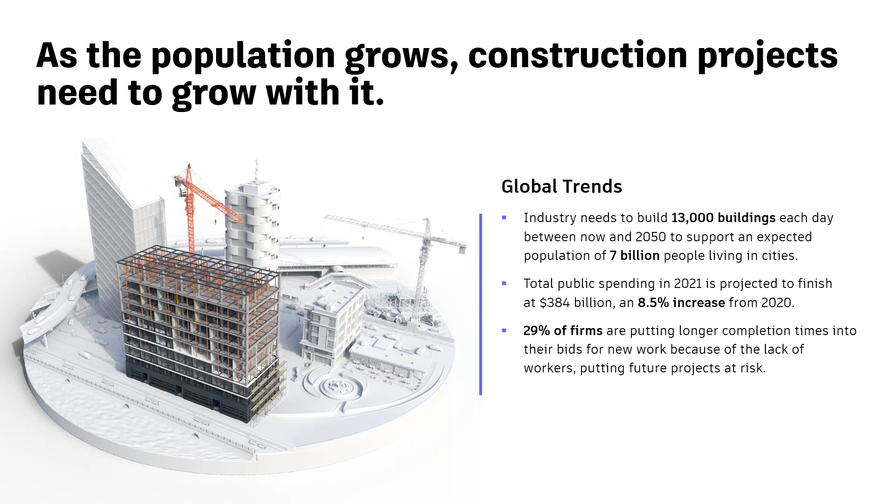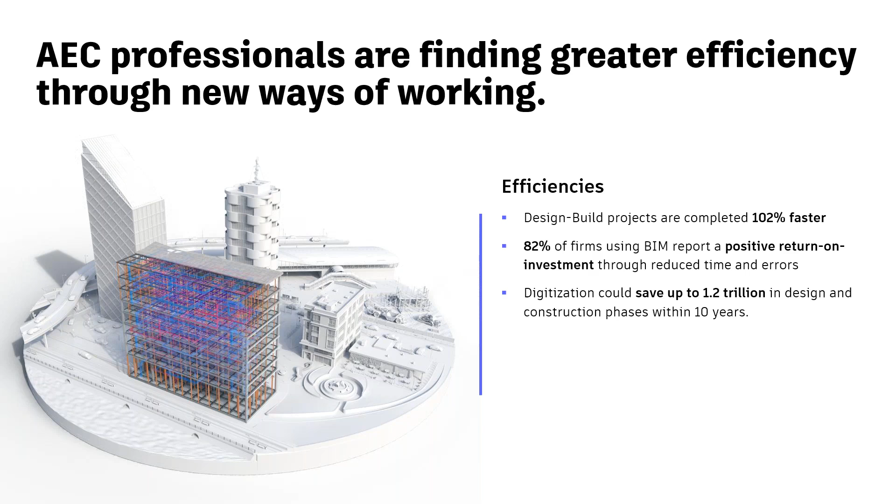But we know that change is never easy, be that changing a way of working, following new processes, or figuring out a new standard.

Wherever you are in your digital journey, be that digitizing for the first time, turning those analog processes into digital ones, or you might be at the next step of connecting and integrating all of that great digital information. Maybe you're even analyzing that data and using it to optimize your processes and workflows.

We recognize that wherever you are in that journey, you need the right tools for the job. You need them to be adaptable, accounting for changing conditions and increasing that connection between teams and products. You need them to be easy to use, allowing all members of the project team, no matter their level of expertise, to access and use all the data available to them. You also need these tools to be as automated as possible, making your life easier and taking away some of those time-consuming repetitive tasks.

So from Autodesk, what we are trying to do is help you with those efforts and outcomes, and try to automate more of the processes, make your setups easier so you can save time and promote better collaboration.

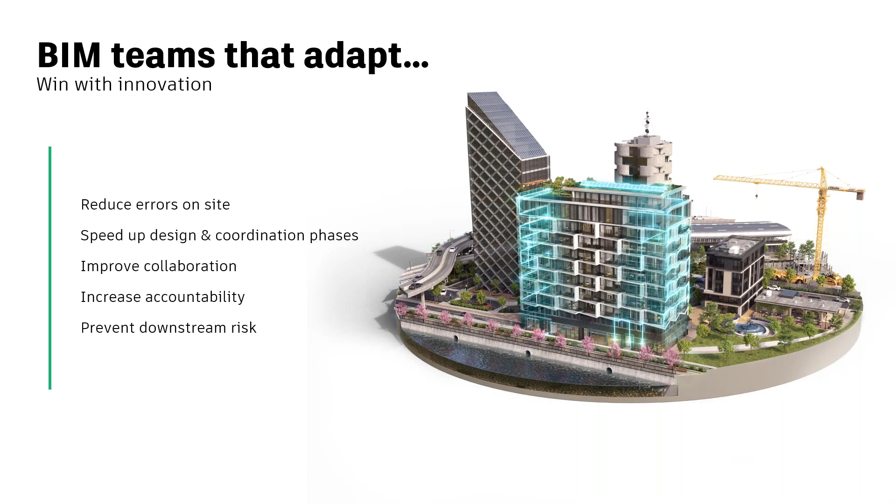Into a more cloud-based and automated design coordination process. And that's what we have been doing with model coordination, taking all those good bits from Navisworks and putting them into the cloud at a time that we know is critical for our customers, since we are all working in this digital way, right? And we are all in different locations.

And we understand that now collaboration through the cloud is critical. And that collaboration we are not only promoting, obviously, in the coordination processes, as probably most of you are aware, our Autodesk Construction Cloud focuses on various parts of that journey, starting from design into what I will call more pre-construction, construction, and operation.

And for that, we have various modules inside the Autodesk Construction Cloud that can help you with that. But ultimately, what is useful is the connectivity of all of them, and the capability of sharing that data and having connected workflows, let's say, for example, through issues in various of those modules.

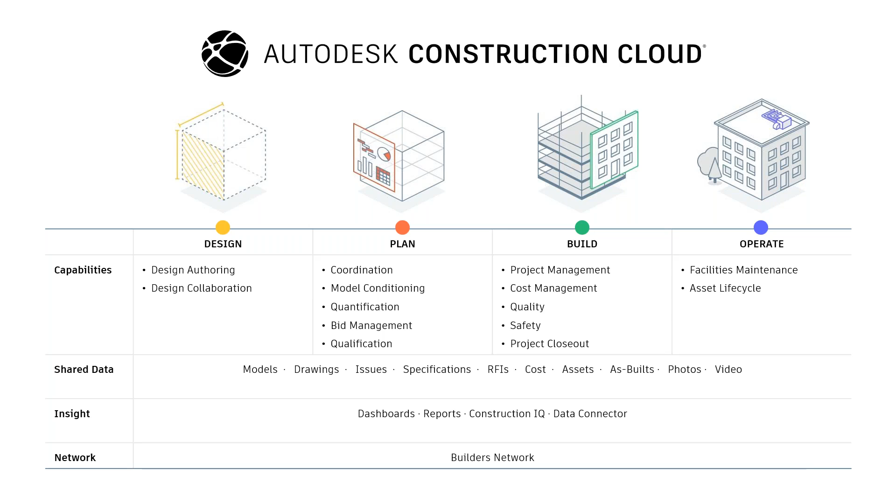And now focusing a bit more on what is Autodesk BIM Collaborate. From our side, we focus on particularly two products. Design collaboration, for those not familiar, focuses on sharing information in a controlled manner across various teams. Then we have model coordination, which focuses on aggregation of models for design coordination processes, and it automates that part of clash detection.

And of course, in both products, you can also have a communication tool through issue management, and you have that base of collaboration through the cloud with Docs. Also in the last year, we developed change analysis, which helps inside design collaboration to focus on what is changing in the project. So all these products, as we say, try to focus on the design and coordination phases.

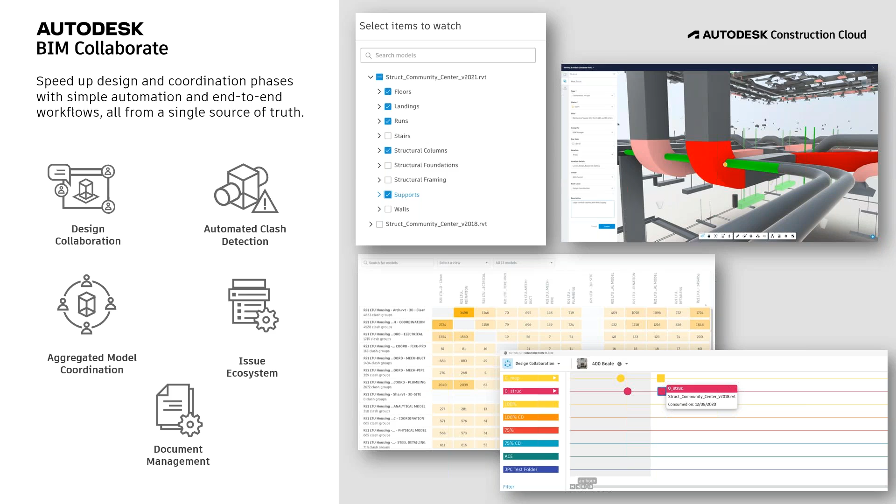So now we are going to go through new releases and then into the demos. So regarding the new releases...

I think the demo will definitely be more useful and self-explanatory, but as you can see, in the last 6 to 12 months we have been working on workflows that connect desktop applications to the cloud, and equally developing more automated workflows and easier setups in the cloud platform products. So I think now we can start the demo.

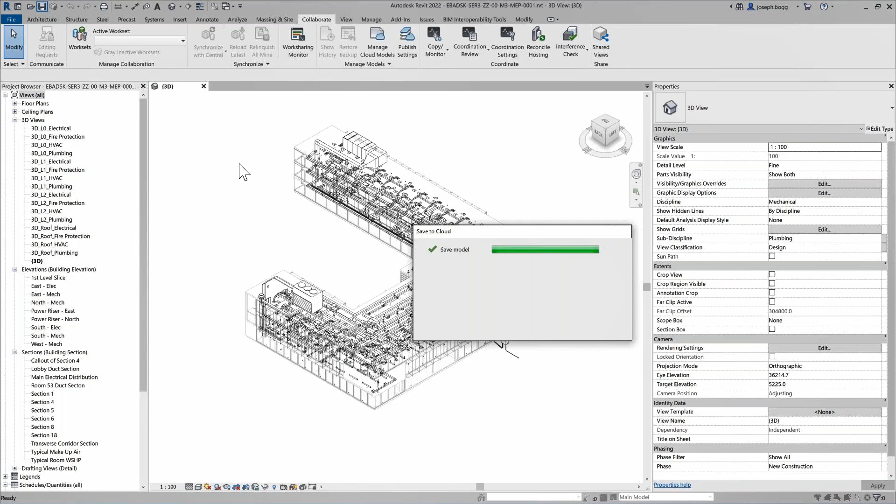So in this demo, I'm going to show you change analysis in design collaboration. And in the demo, we start in a desktop application, actually. Generally, as a designer, you might be working in Revit, and we now have the capability of connecting that desktop application together with Docs in a really easy manner, by publishing the files from the desktop into the cloud.

I think it seems that it got to stop the video.

Okay, I think now it keeps on running. So what you will see is the user is publishing a model in the MEP folder, and as the video goes through, it will open design collaboration. So that's the connectivity we are showing from desktop into the cloud.

In design collaboration, I am in the MEP team. On the left side, we have a lot of tools to communicate, like issues, meetings, and so on. On the top, we have the various teams in the project. In this project, we set up a classic building team of architectural, structure, and MEP, mechanical, electrical, and plumbing. The user belonging to the MEP team sees that in the last weeks there has been sharing of information throughout.

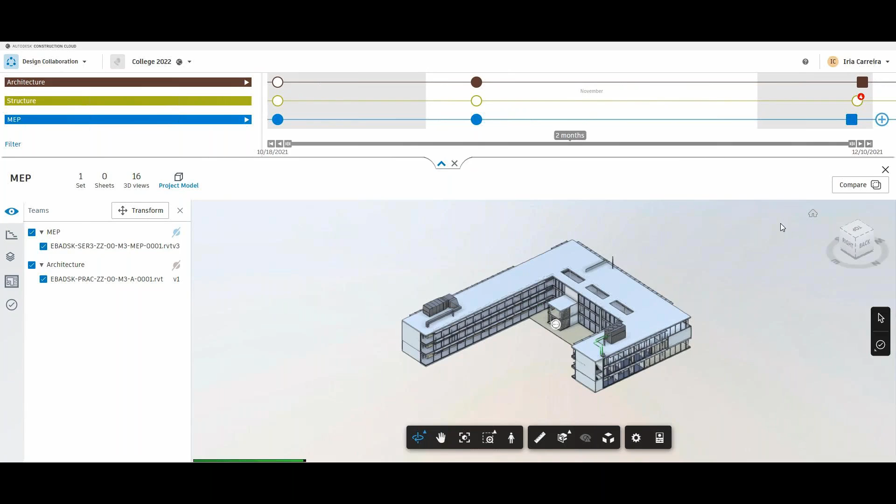As the user wants to understand how the design has evolved, they can click into the project model and start to visualize all those model shares by the other teams, federated. Once in that screen, the user can click compare and start triggering the changes tool.

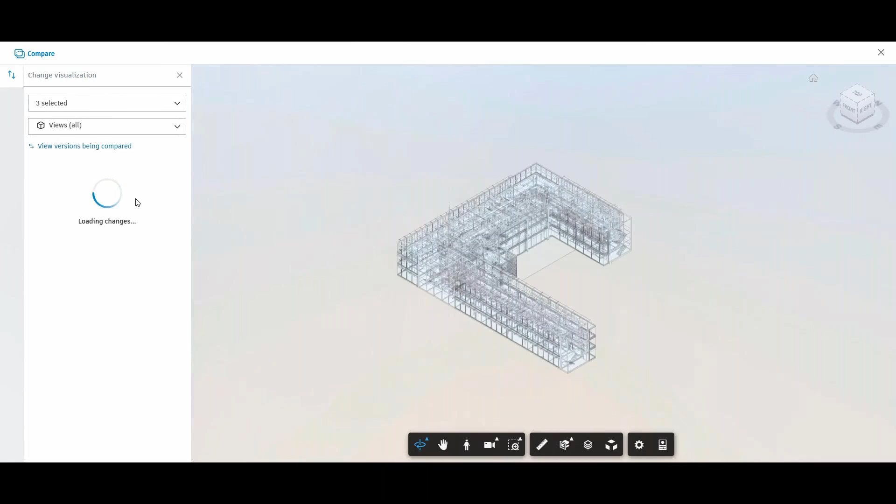In the first screen, the changes tool will allow the user to tailor what they want to look at, and then start to look at the different versions. For example, you will see here that from version 4 to version 5, there was no change, so you can change that version to fully understand where there has been changes, where it hasn't. You can compare the first one to the last one, and now we can see all the changes in all the models in the project.

Obviously, if you're in the design phase, you will expect thousands of changes, and we are aware that this is difficult to digest. So in this case, we are only interested in changes regarding geometry, so shape.

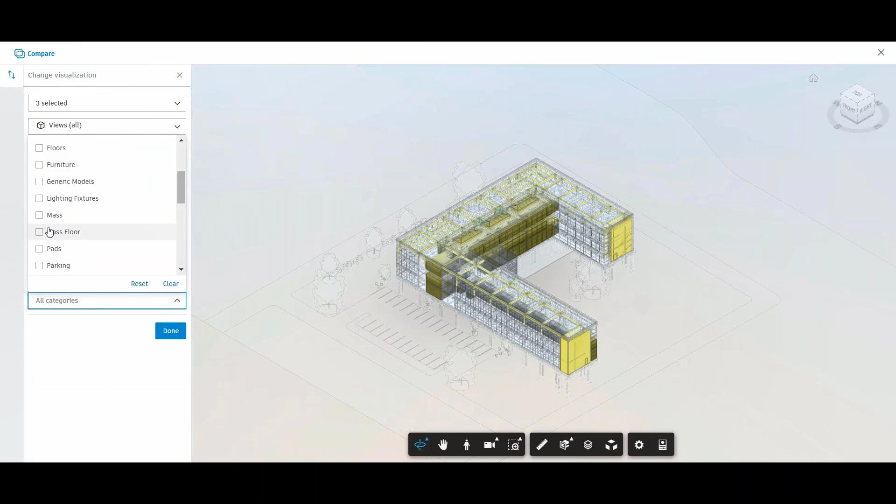Because I am in the services, I'm going to filter by the structure and architectural discipline, and on top of that, we can go into the categories. So I will care at this point only about walls. Once I've done that, I can see it has been filtered, and this belongs to the structural model.

Now maybe I want to understand better what has changed in that shape. So I can see a little note of information that it's a volumetric change, that there's less volume, and I can flick between one version and another to actually understand what has changed in terms of shape.

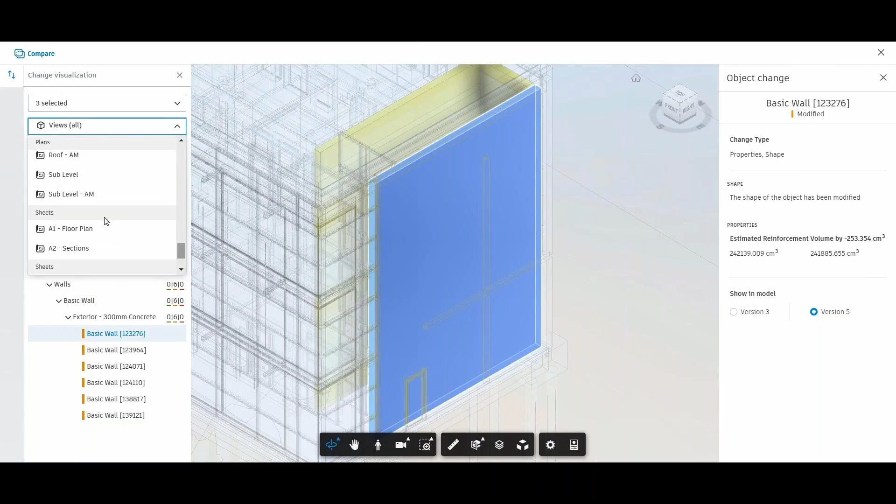Obviously, I can see this in 3D, but we are also aware that sometimes it's more comfortable looking at plans or sections or whatever view you have created. So I can also go and filter to a different view and have that accessible.

Apart from that, you can go back. Now, because I'm in the services, I really care about those structural changes, and maybe I want to have that as part of one of my reports.

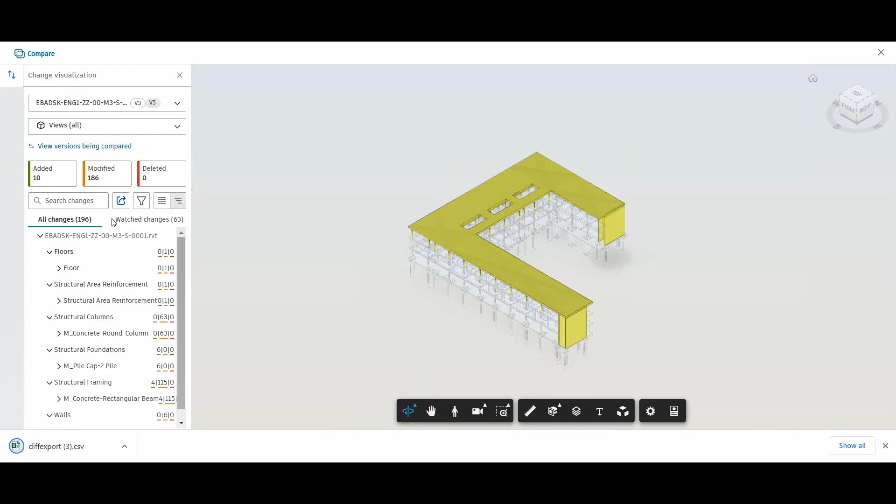We are aware that some of our users use Power BI, so you can export a CSV file and have that as part of one of your reports. So that's one of the workflows that can give you a really holistic, wide view of change inside design collaboration.

Another example could be you're an architect and you are about to share a package, share some information. In that sense, you can go and look at the changes that have been happening in the models that your team has been working on. Look if the ceilings, walls in this case have changed, and then go back and share this information as part of your packages.

This is one of the workflows that we are aware you can review at the moment, but we can make it, and we will make it, a bit more automated in the future, where this information will already be pre-populated in the package.

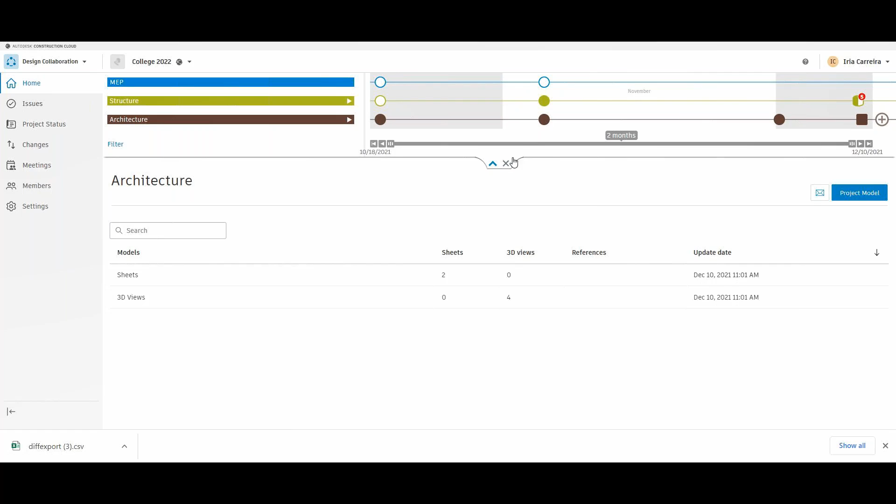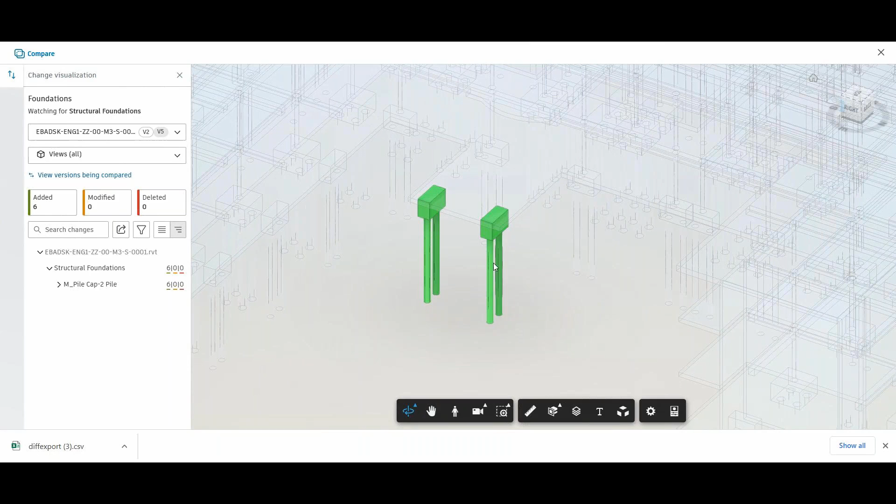Another of the new workflows we have added in the last 6 months, because we are aware that change is important, and there are lots of changes in projects, is the concept of watch groups. A watch group is a group of elements that the user selects on a model that they care about. When they select those elements and give it a name, in this case foundation, the system will create a subscription where if something changes, it will automatically notify you once that model is uploaded into design collaboration.

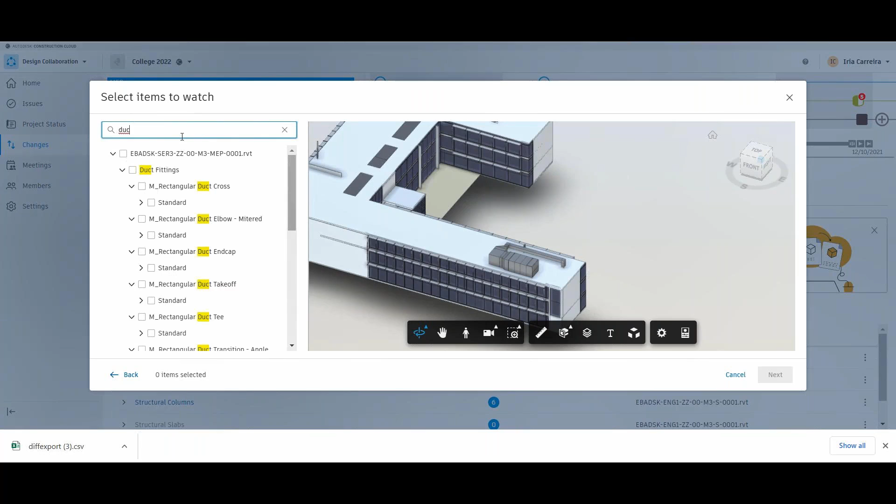Here we can see an architectural team user looking at the mechanical, electrical, and plumbing model, selecting some tags. You can go and write in the search and select some of the ductwork in the model. Classic problem: you're an architect and the MEP changes the thickness of the ductwork, so you have to drop the ceiling and look at the ceiling height. So maybe I just want to be aware every time those ducts change in the services model, so I create that watch group with the ducts.

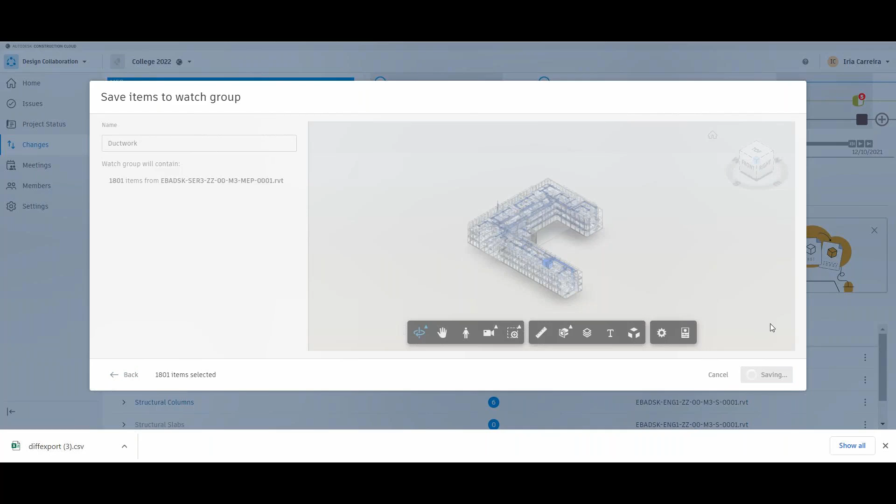Now you can see the watch group has been created, and the next time the user consumes a model, you will get a notification saying there have been changes in your watch group, so you can go and review that.

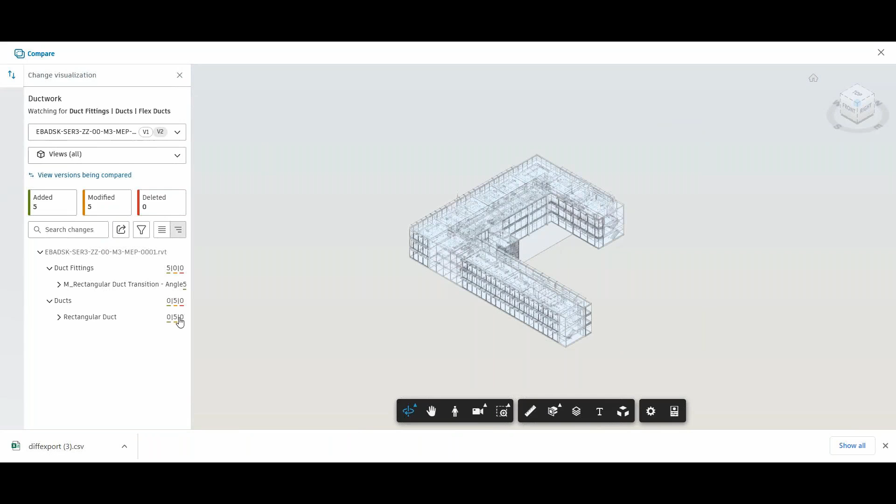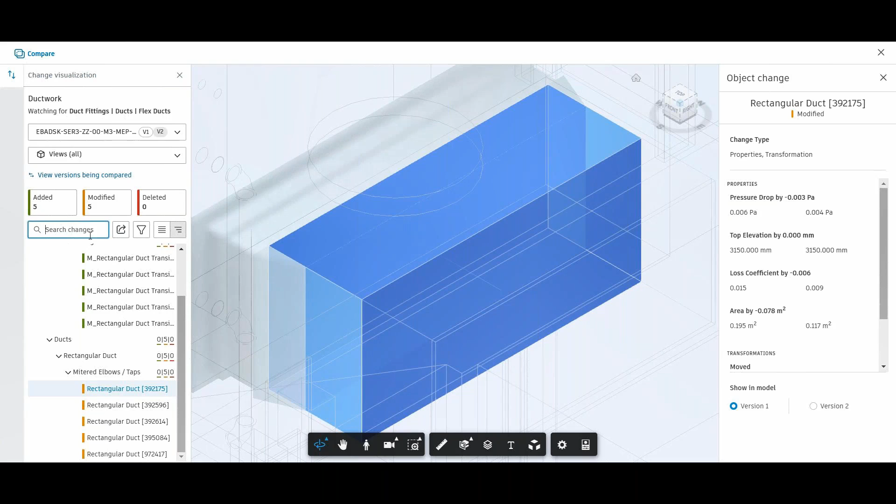Obviously in the reviewing, this is just that, but you can fundamentally create various groups, and you will have the same capabilities as in the previous compare tool. You can flick between the different elements, filter those elements if you have something not as specific as this one, and see all the information detailing what has changed. You can also use the different search bits in the tool, and export a CSV file, which in this case will only contain the information of those watch groups. So it's also a good way to filter that.

So overall, what we've seen today regarding focusing on changes in design and design collaboration is that for the last months we've been working on being able to analyze change not only in 3D but in 2D, and to have a better experience regarding filtering, to understand changes from different teams through various workflows. We understand that sometimes we need a more holistic understanding from the project model, from the package, or just from your work in progress model.

And ultimately we created watch groups. Fundamentally, what happens is every time you upload a new model into your system, or one of the other teams uploads that model, if you have created a watch group with some 3D elements that are in that model, an automatic notification will pop up in design collaboration the next time you enter.

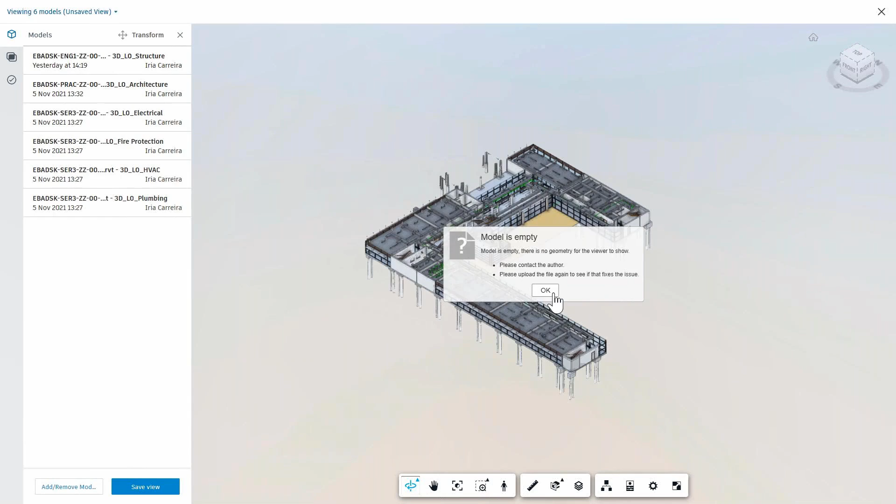So you can see we've aggregated all of that content in one place in the viewer, and we can start reviewing that. For example, we could create sections, we could create inspection issues, but what we can also do is add models later if we want to. Maybe I forgot to add something, I can add that, or if I want to take a model off, I can untick a model too. In this case, that's perfect, that's what I want to see.

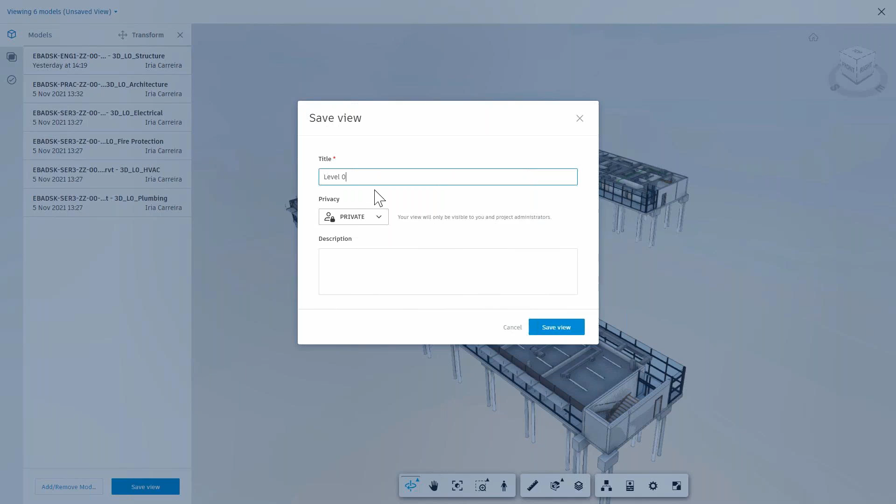What we also let you do is save this collection of models as what we term a view. So this is just a collection of models that you can access a little bit quicker later on. In this case, we save that view. I can see that pop-up come on in the top right. And if I just close out of this view in this instance.

So what I want to show next is the Views tab. Essentially any models that I aggregate and save a view from would appear in this tab, so I can quickly access that later. So I could select level 0 and that'll load those models automatically for me.

So let's take a look at the clash matrix. Like I was saying, we automatically clash everything for you, and we present that in this heat map effectively of those different views, in this case from all those different Revit files. So again, we've got that similar search tool.

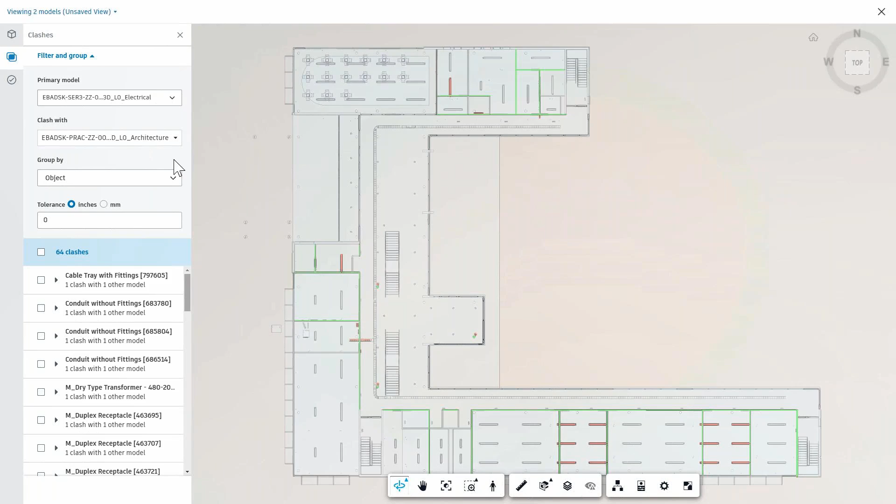That's my priority today. So what I can do is click on that box and it'll open those two models in the viewer for me in the clashes side panel. I can see the top drop down there is my primary model, which is electrical, so if I were to create an issue, it would create it against that model. And I've got the clash with button. I can see in this case, I've got 64 clashes between these two models.

And with our tools in the viewer, we let you filter those clashes and group them in different ways. So with the recent enhancements to the group by tool, you can group by any property of a clashing object, so it really lets you focus on what you specifically want to look at.

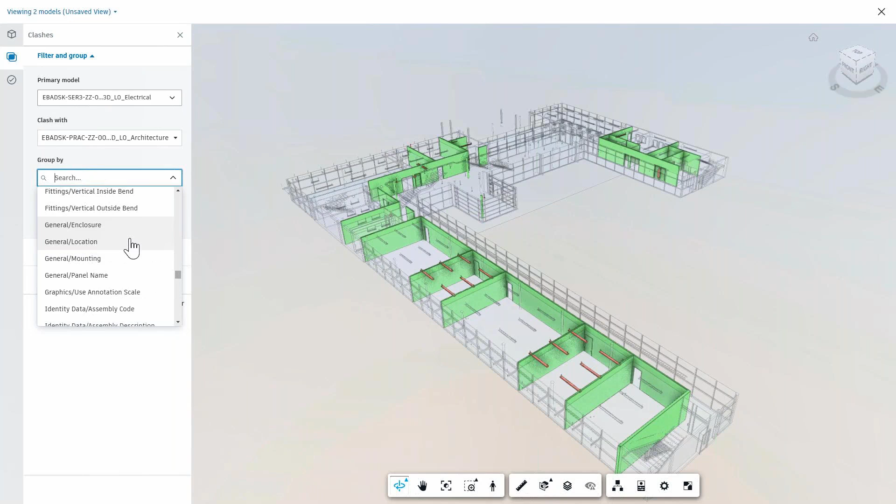Let's just look at, see what other information we have, but let's pick, for example, locations here. Maybe I've got location data within my Revit file or any other supported file formats. So what I can do is use that to group my clashes by different areas. Here it's grouped those into effectively different rooms like power riser and technology.

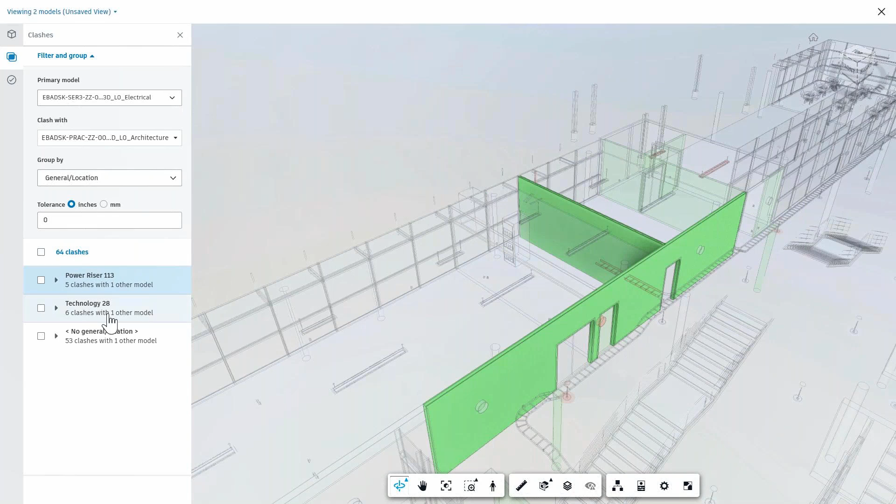But maybe in the future I want to search for that again, I can quickly find that. So if I find a way to group these clashes that works really well for me, I can search and find that really quickly in the group by tool.

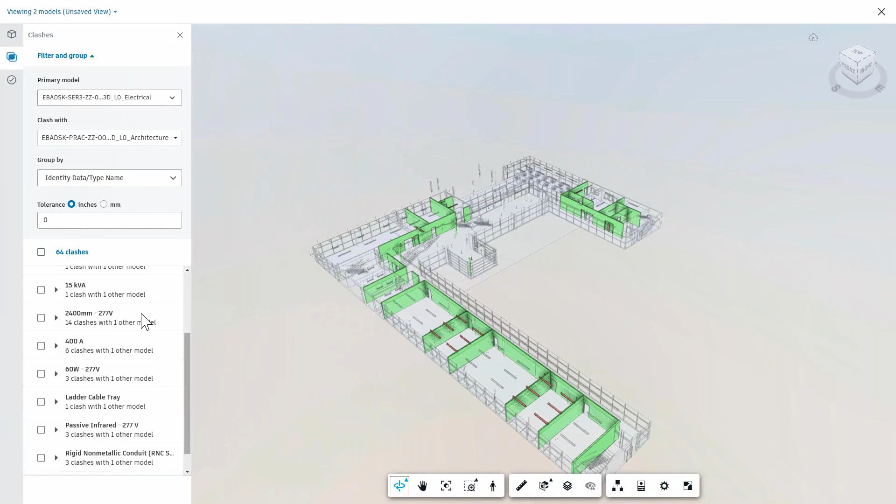Let's show another example here by type mark. Maybe on this project I'm a designer and I use certain type marks for different elements. I can then use that to group those clashes by. So in this instance, let's just use type name. So I can see we've grouped that by type name.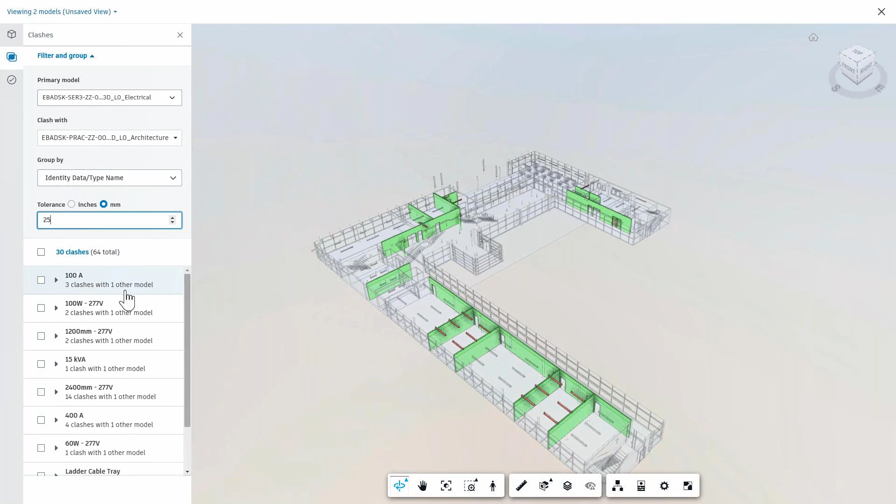But I've also got this tolerance filter that lets me dynamically change what tolerance I want to use. So I could use 1 inch as an example, and I filtered out nearly half my clashes. Or I can also use millimeters, so in this case maybe I use 25 millimeters, again this filters half my clashes out. So today I can focus on what's really important to me, just those 30 that are over 25 mil.

So let's investigate one of those clashes. In this case, we can see maybe an electrical box clashing with a wall. Maybe in this case I'm not worried about that specific clash, that can be solved on site. So what I can do is create a non-issue from this, or create a 'not an issue'.

Here it gives it a title. I give it a reason, so it's a valid interface, and I can maybe put a comment on there saying this can be resolved on site. So I can clear those clashes out.

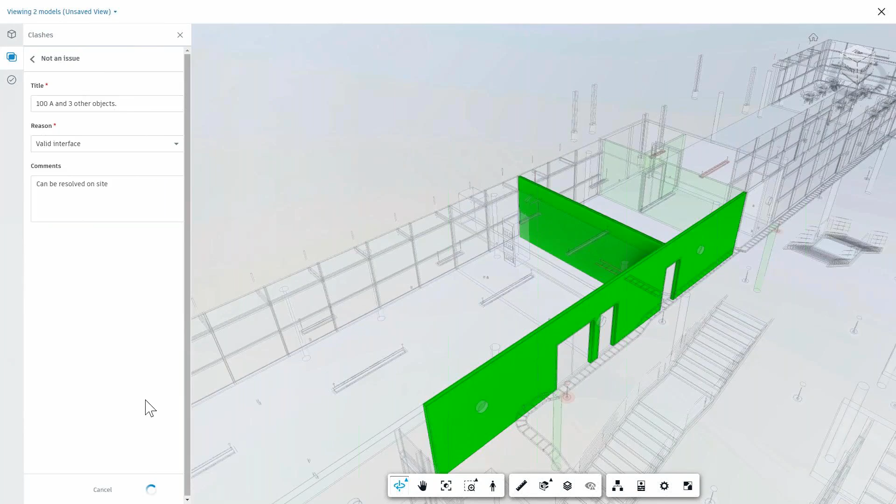Investigate the next one. So in this case, I can see 2 light fittings clashing with 2 columns. So in this instance, I do want to note that as an issue, as something that someone needs to go away and resolve.

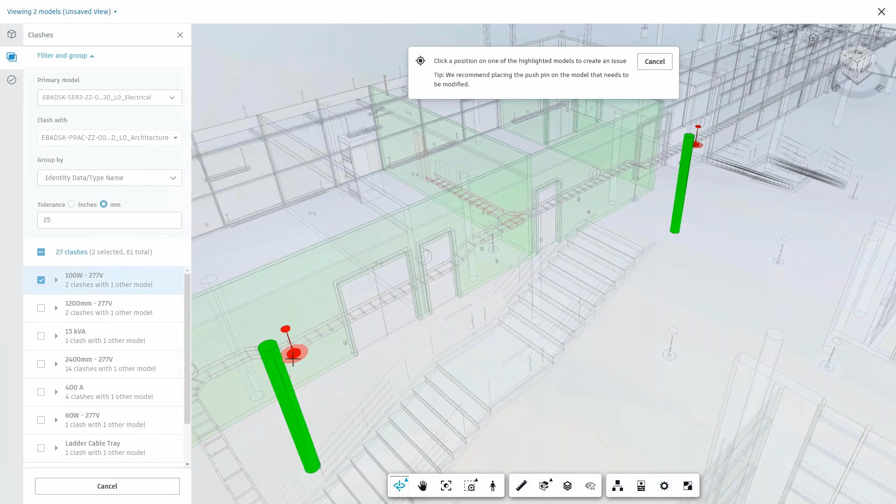So what I can do is click on that checkbox, click create issue, and place my push pin. So this is effectively creating an issue against this clash group. This pops up the side panel.

So I can see here I've got different descriptions that are automatically populated. Maybe in this case I want to assign Iria as a watcher to this issue so she can keep an eye on it. And in model coordination, we also create a screenshot of that clash and those highlighted elements, so I can review that later on in any context if I want to.

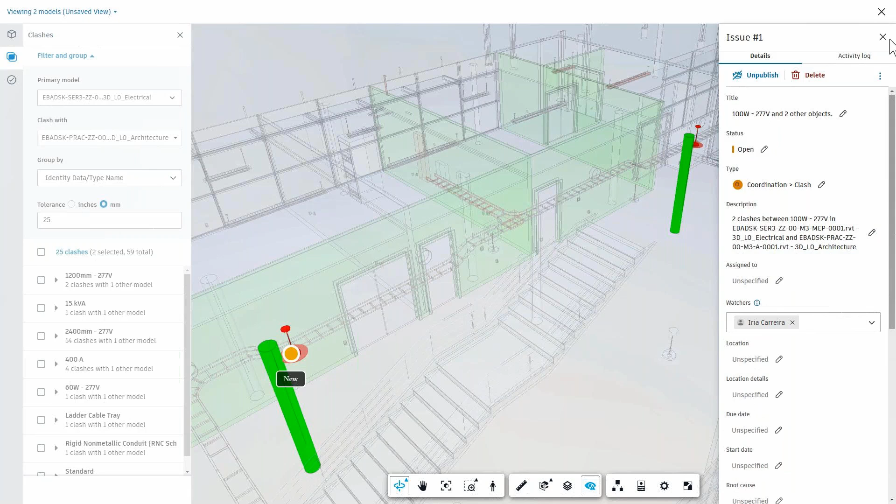So there I've created an issue out of that group. What I want to do now is show you that in the issue side panel. I can see that issue push pin there on those models, but what happens when I click it is it takes me to that camera position when the issue was created, and also highlights those objects.

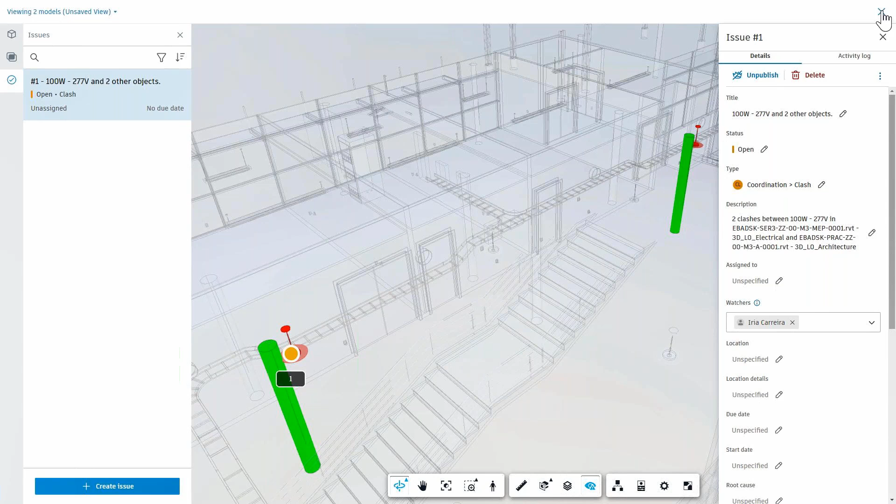So if I do want to review this clash later, I have a really quick way of doing that, getting into that context.

So now back to the clashes tab. You can see we've got various tabs in here as well. The assigned clashes tab gives me a list of all of those clashes or issues that I created from clashes. So any new other issues that I create from clashes would also appear there.

I also have the closed clashes tab. So any clashes that I note as not an issue, we do take a screenshot of that, and we also let you later on reactivate that if you want to. So maybe in the future I recognize this might be a clash and I can reactivate that.

So what I want to quickly do now is jump down to Navisworks. What we have in Navisworks is something called the Navisworks coordination add-in, and what this lets you do is load content from model coordination.

So say if I've uploaded something to Docs, I've got a coordination space. What we can do in Navisworks is use that to access that content. So in this case, if I go to the project I'm working on, which is College 2022, I have the ability to switch between different coordination spaces as well.

So I've got the architectural one and the shared one. In this case, I want to look at the shared. I also have the ability to filter that list of models, so I can do that by typing in there.

But I also have the ability to load in views. So if I've got pre-saved content that I've saved as a view, I can download that. So what we're doing here is pulling that information directly from model coordination down to Navisworks, effectively bringing that geometry and all the data associated with those parameters and properties associated with those objects.

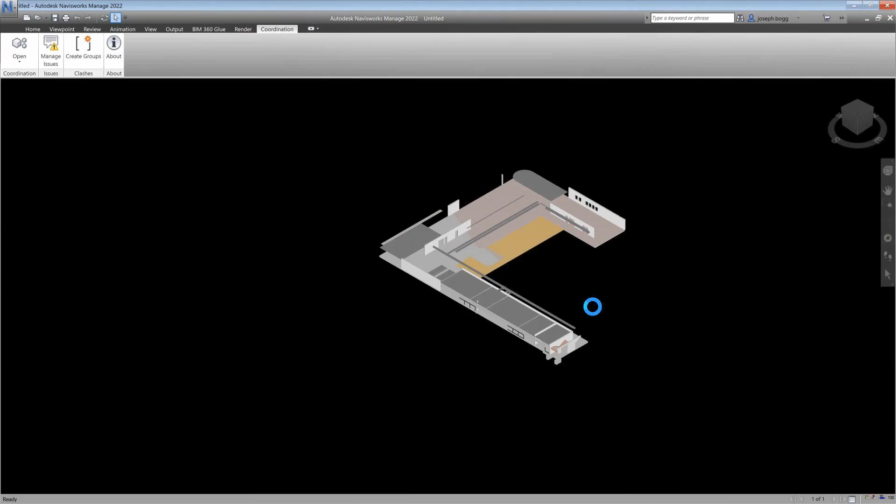So you can see here we've loaded that content down. So what I could do in Navisworks is anything typical that I would do, so I could create sections, create markups in here, create viewpoints, those sort of things.

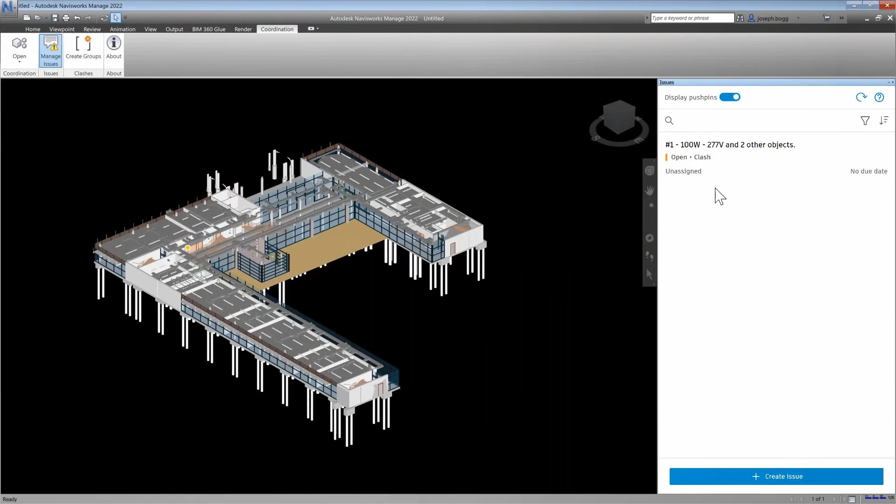But in this case, let's just open the Manage Issues dialog. So effectively what we do is visualize those issues from model coordination directly in Navisworks. As you can see here, we also support that highlighting as well, so if you click on that issue, we show the highlighting of that clash or clash group. We also have all those different parameters and also the saved screenshot as well.

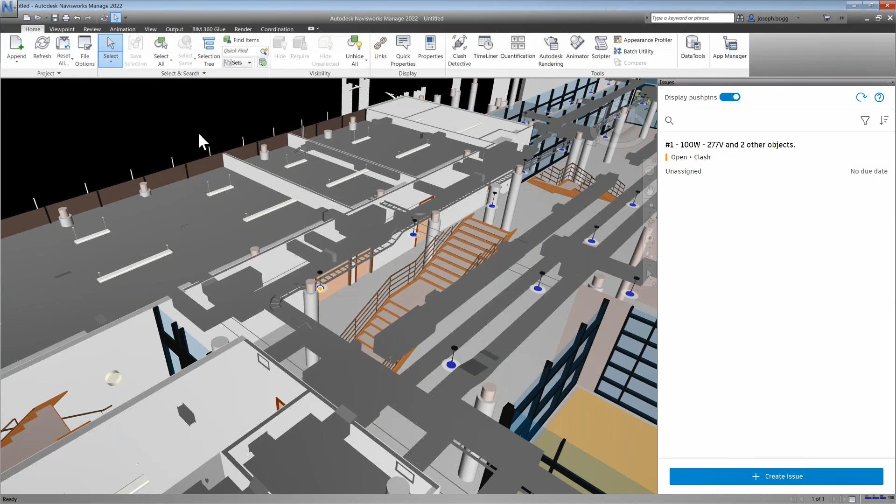So the next thing I want to do is quickly run a clash test in Navisworks. I've loaded this content down from model coordination. You can see here I've got test one that I've just created, and let's just click 2 sets of models to run a clash against.

So this is something that I could typically do in Navisworks. I could also bring in search sets and save clash tests that I've created previously. And I've also got a tolerance value there if I want to use that.

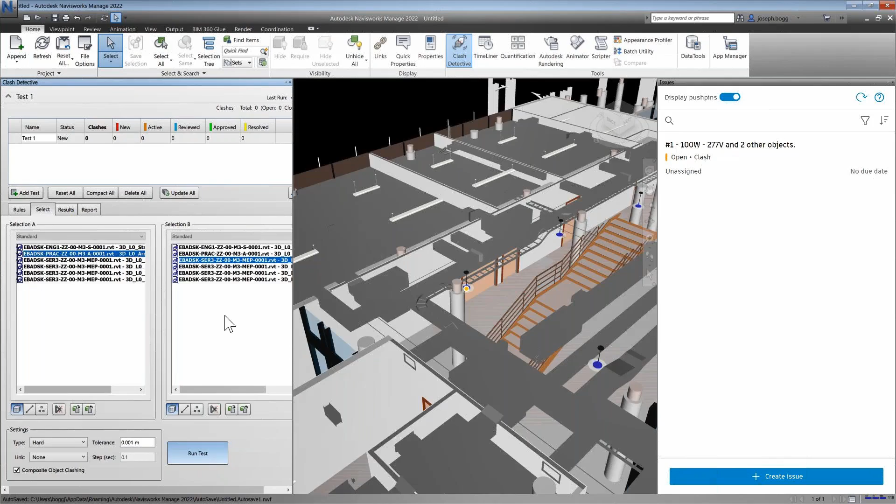So quickly running that test, I can see I've got various clash results. So I can cycle through those like I typically would in Navisworks, seeing what some of the problems are.

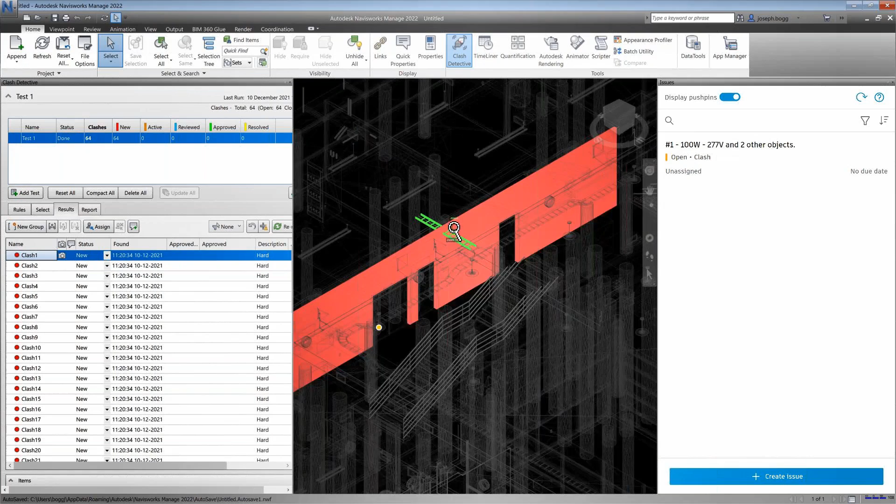And then if we go back to the first one, just have an investigation of that quickly. Say in this case, it's probably not an issue, that'll probably get sorted on site. But maybe I spotted something else, so let's go to clash 13.

So I've got a light here clashing with a wall. In this instance, I would want to notify or identify that as an issue for someone to resolve as well. So what I can do directly in Navisworks is create an issue on that clash.

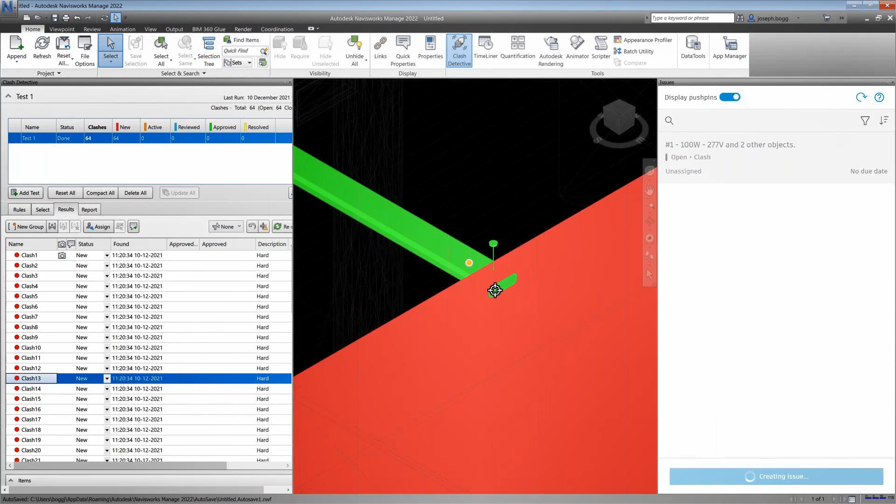So there, I pick the object I want to create the push pin against. We generate that issue, give it a title, give it a kind of coordination issue type. And what we also do in Navisworks is capture a screenshot.

But what I can do here is edit that description. Maybe I want to just add a bit of clarity around this, so we've got a clash between a light and a wall. Add that to the description, tick that as okay.

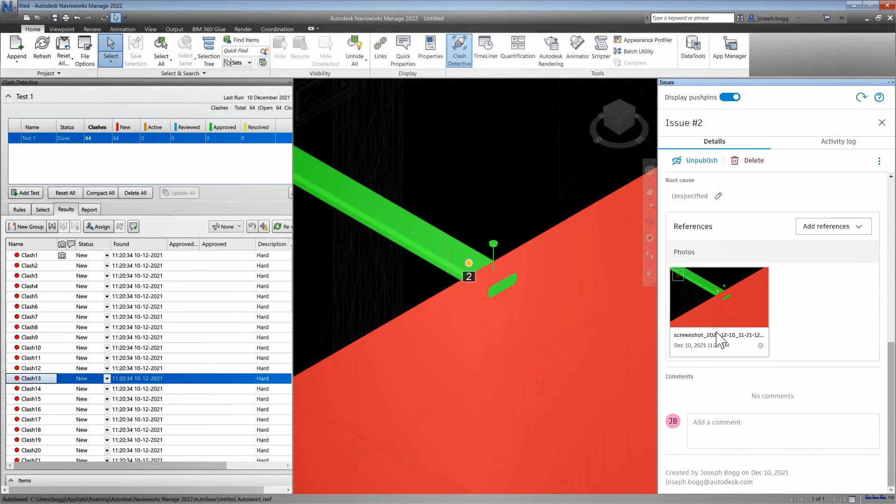And like I was saying, we have got that screenshot as well to add further clarification if someone views that later on. I can see both those issues now - one issue created from model coordination and one issue from Navisworks.

What I want to quickly show you as well is one of our new features, which is the clash grouping tool in Navisworks. So here I get to select a clash test - in this case, test 1 that I just created - and then I can choose a parameter to group it by. In this instance, let's just pick a couple, and then I can prioritize by selection A or selection B.

I can also add today's date if I want to as a kind of label, and also an abbreviation there as well. So that gives me a preview. In this case, it's going to only create one clash group, which in some cases might be fine - it's grouped those quickly.

But say I want to change that later, I can. So we've got an option here to untick keep existing groups, so if I want to change that at a later date, I can. So let's choose a different parameter, say name, click group clashes, and again, I've regrouped those clashes.

So quickly creating groups for those, which is really great in Navisworks. So now if I jump back to model coordination, if I click on views, in this case I'll click on that level 0 views that I created previously.

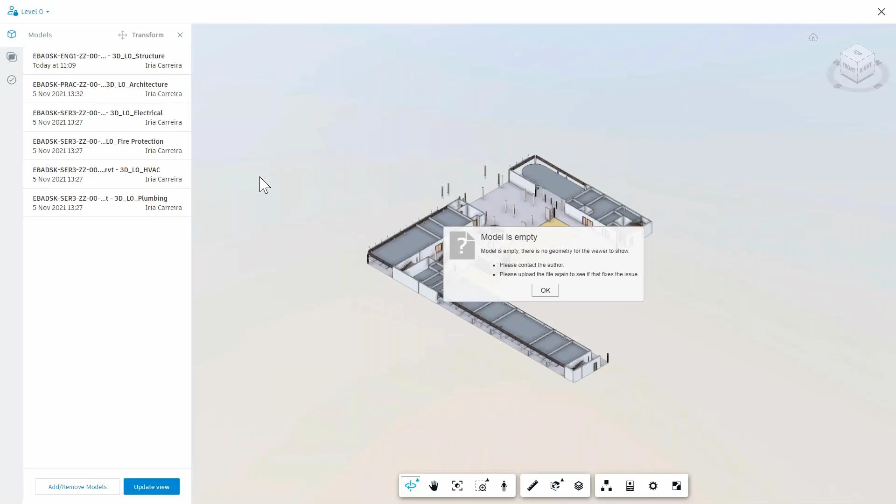So maybe I've been reviewing things in Navisworks, I've created an issue, come back to model coordination. Maybe I do want to review a couple of the clashes in model coordination as well. In the side panel, we also have this ability to turn certain models off for clashing.

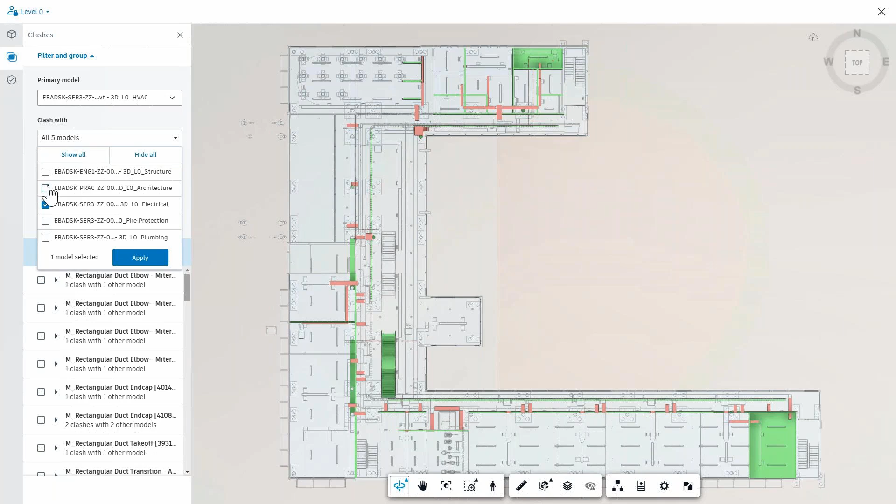Or kind of filter those clashes out. So say if I do want to prioritize architecture and electrical, I can do, but I can have those other models in there for context as well.

But say let's have a look at issues. So this is the first issue, which we created in model coordination. And I can also visualize that second issue that I created in Navisworks directly in model coordination. So we've got that really great connection between those two products.

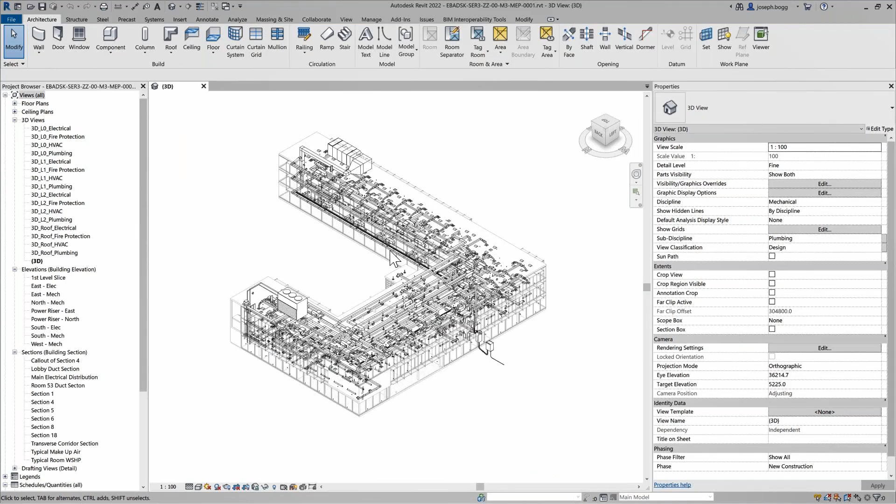And for now, I'll jump back to Revit, so the authoring application. We also have an issues add-in for Revit. So if I click manage issues, this brings up the issues side panel.

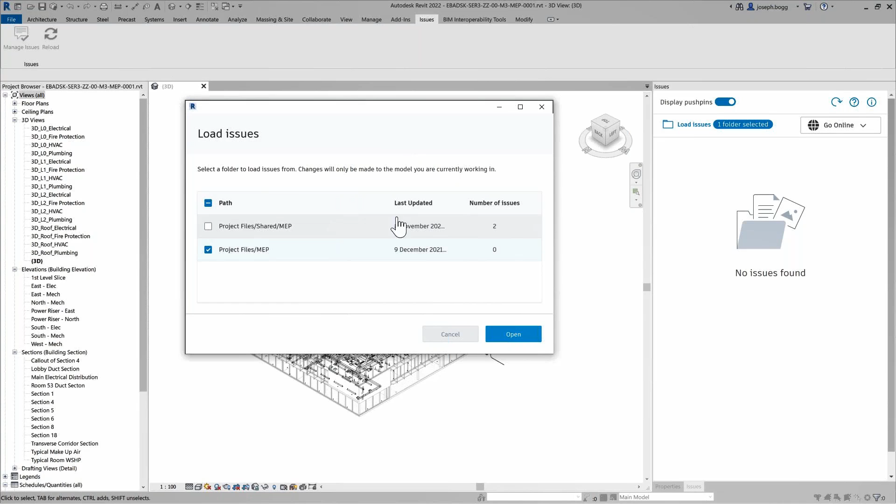So this is actually the work in progress model from the teams folder in design collaboration. But say I want to load issues from the shared models as well. So what we let you do is load issues using the load issues dialog. So I can click on the shared model and load issues from there, which is where I've just created those issues.

So what we let you do in Revit is effectively click that issue, and we'll zoom into that camera position. We'll give you that context, and we also select that object. So you can see that interconnection between all of these different things.

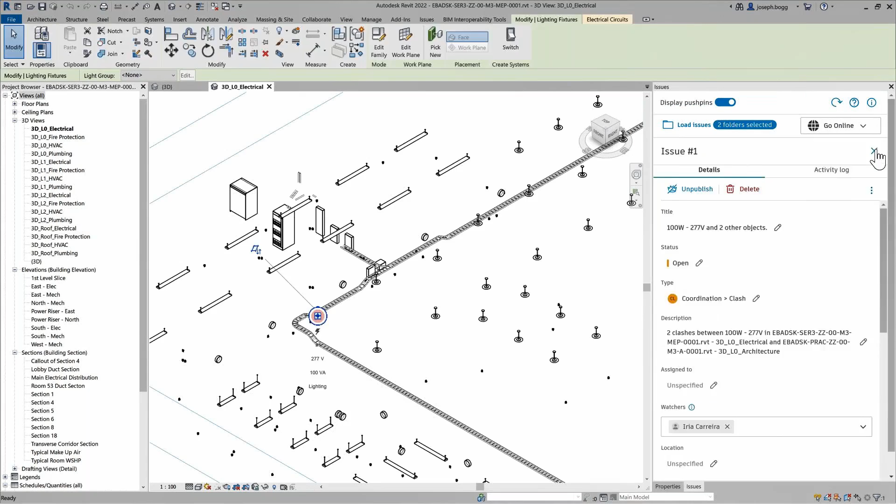Same, I can visualize that Navisworks issue. I can view that screenshot that I created, and also we select that object. Again, the interconnection between Revit and Navisworks.

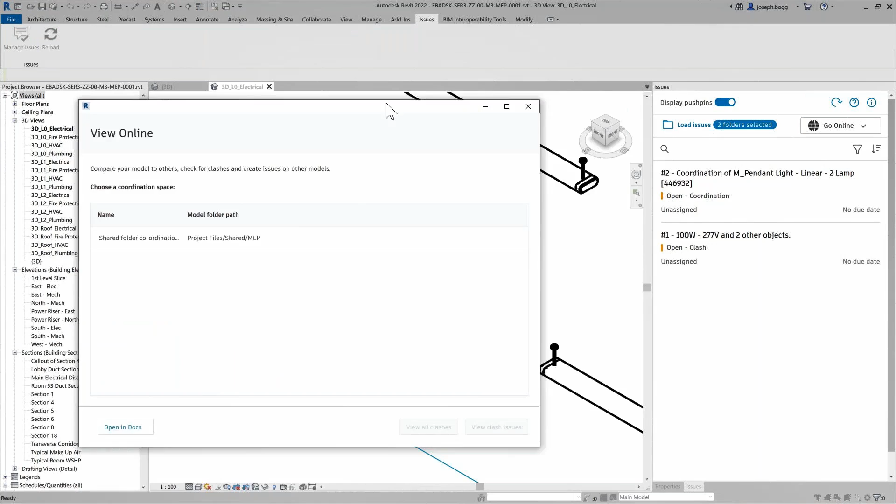So a recent feature we've released is the Go Online tool. I can use the View Online dialog to either open that model directly in Docs, showing the location of the model I've got open, or if I've got a coordination space, I can link out directly to the clash matrix.

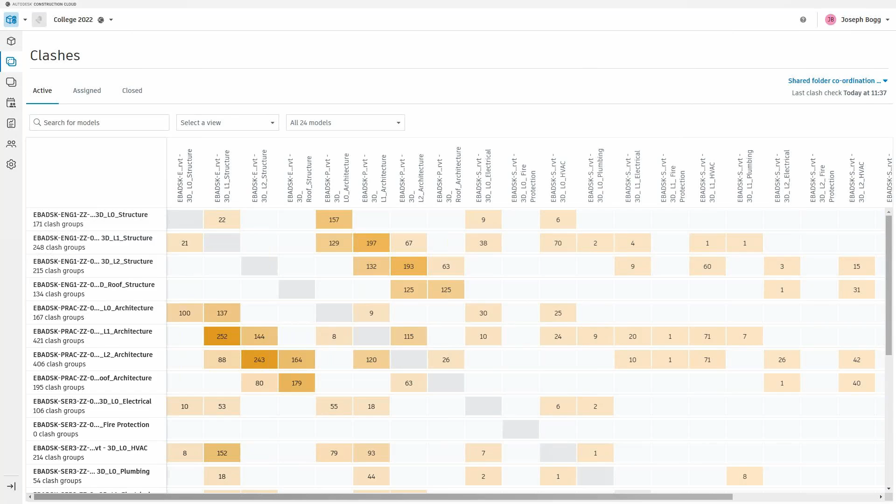This is really there to try and get modelers and designers to self-check their models in model coordination. We automatically run clash and provide links out from the authoring application for different designers and modelers to see where they have clashes. We also provide a link to the assigned issues tab so you can view those assigned clash issues, and a link out to all project issues in Docs, so if you want to view context of other issues on other models, you can do that this way.

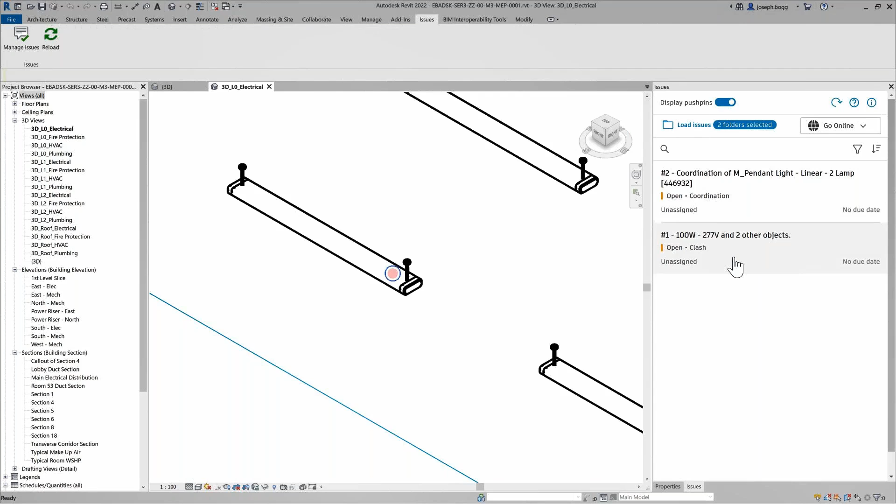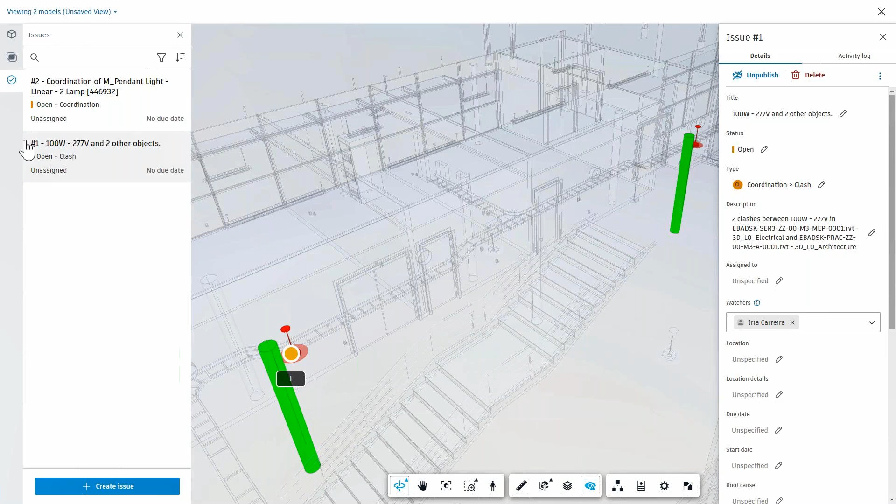When you actually select a model, we change the options slightly. We have another feature called open issue. If it's a model coordination issue and a clash issue, clicking that directs you straight out to the viewer in model coordination, where we see the context of that issue, the clashes, and where it was created. So again, we've got that interconnection between all of these different products.

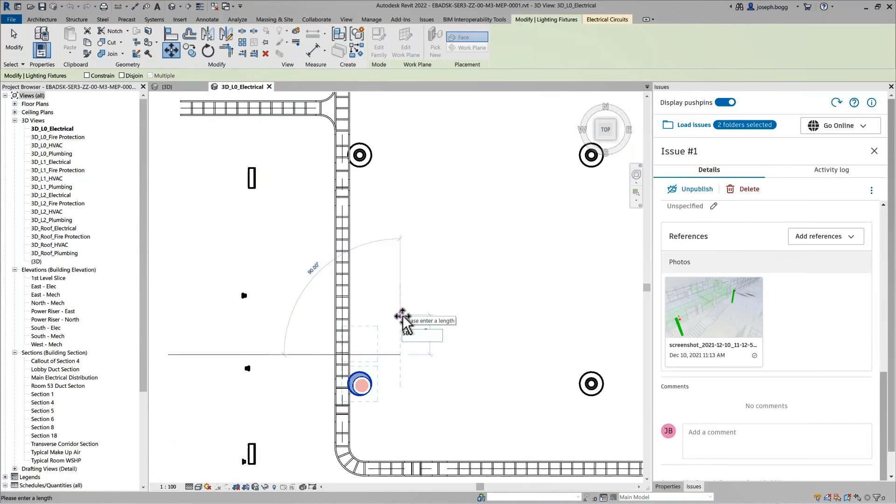Say in this case I want to solve that problem. I know what I need to do — I just need to move that light fitting above. I can look at that screenshot to give me an idea. If I had two screens, I could also have model coordination open at the same time. So maybe move that one up 500 mil and do the same with that one to effectively solve that clash. Perfect — in this case, I've solved that problem.

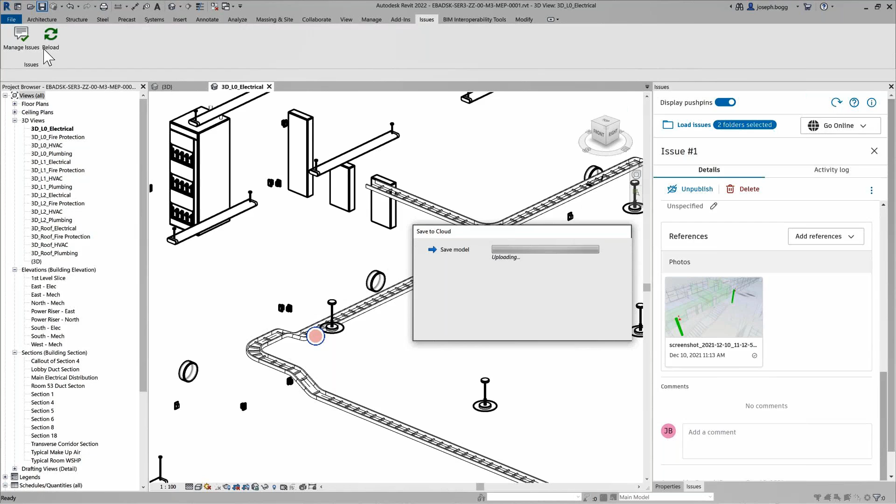What I can do is save that and then republish this file. Effectively this goes into that process we talked about previously. Now that I've changed these two light fittings, you'd be able to see that in change analysis, but that will also be visualized and incorporated into automatic clash as well. So all a designer or Revit user has to do is save and upload, and we do all these automatic processes in the background to update that information.

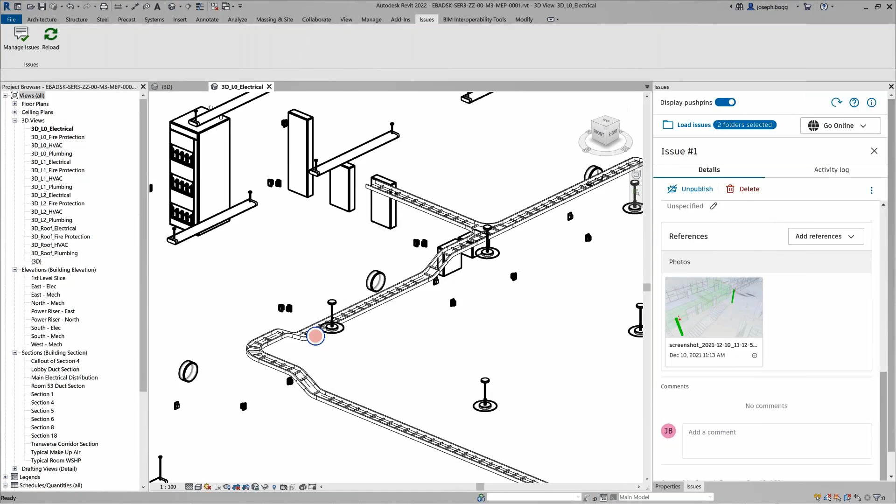Perfect, so that was the end of that demo in relation to model coordination. Just to summarize what we went through: we created a coordination space in model coordination for automatic clash detection. We chose a folder of content to run clash on with as little setup as selecting it — that's all you had to do to turn on automatic clash. This will automatically update when new or amended content is uploaded to that folder or its subfolders.

Once that content is in model coordination, we let you aggregate and review those models, coordinating multiple disciplines at once. With automatic clash detection, we also provide easy and intuitive tools to focus on what matters most to you. With the clash filter, we let you filter certain models out from clashing during that session, maybe just using their models for context. With improvements to the group by tool, we also let you group clashes by any property of a clashing object, which really lets you focus on which objects matter to you.

Finally, with the clash tolerance filter, we let you dynamically set a tolerance for that session, allowing you to pinpoint which clashes are a priority. Issues and non-issues can then be created from these clashes. Issues can also be created in Navisworks using our connected issues ecosystem, with these issues then being visible in the authoring software, where model authors can solve these problems and republish, again kicking off all those automatic workflows.

If you are using disconnected forms of legacy collaboration, your information might not be in the same place. You might have lots of different products and systems that are disconnected, and this might cause a lot of confusion in your project teams — where do they access information, and is that information up to date? There are these questions surrounding that.